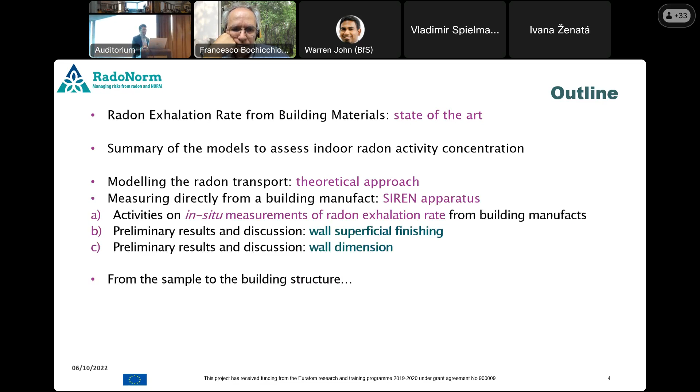Thanks to Radonorm, we were able to perform many measurements in situ, and we will see preliminary results on these measurements with a short discussion. Then we will have a part dedicated to comparing radon exhalation rate measured on samples versus radon exhalation rate measured directly from building structures, followed by some short conclusions.

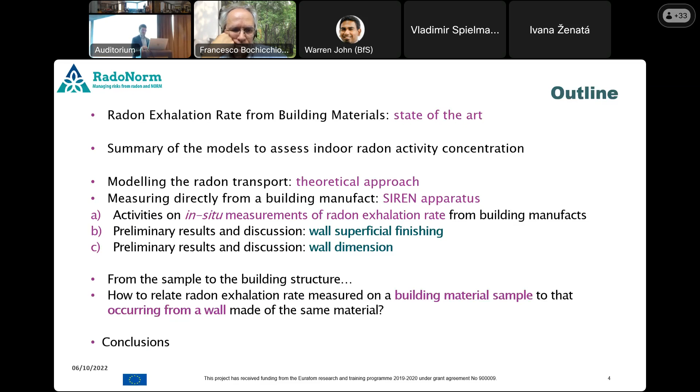Regarding the state of the art, we know that a last council directive requires consideration of any source of radon, including building materials. It's important to assess the radon exhalation rate from building materials, both for preventive and remedial intervention to reduce population exposure to radon.

According to the current state of knowledge and technology, the radon exhalation rate from building structures may be estimated through three different approaches. The first is modeling of radon transport inside the structure, by solving a radon transport equation in a porous matrix.

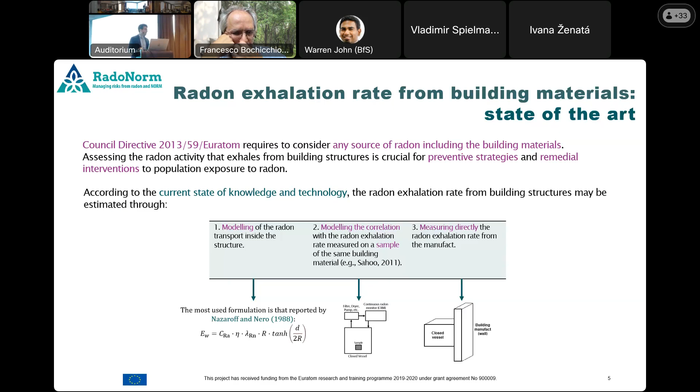The second approach is to model the correlation between radon exhalation rate measured on building material samples and the radon exhalation rate actually exhaling from a building structure made of that material. The third and last approach is to measure directly the radon exhalation rate from the manufact.

Here we have a table, also reported in our milestone, synthesizing the main advantages and disadvantages of each approach. In the first line you can see the references for each of the three approaches, then in the second line the advantages, and then the limits.

Regarding the modeling of radon transport inside the structure, the theoretical approach, the main advantages are that there are no difficulties related to experimental measurements, and it is the only approach feasible in preventive strategies when the building structure is not yet built. The main limits are that a wide dataset of input parameters is required to characterize the exhaling manufact, and the influence of installation conditions and environmental parameters are not considered, as they are very specific to the case scenario.

The second approach, modeling the correlation with radon exhalation rate from a building material sample, is useful because measurements are feasible and well documented in literature. But the main limit of this approach, which is also the most used, is that there is only one model to correlate the radon exhalation rate measured on a sample to that occurring inside a building manufact, for example a wall. There's also the requirement of a representative sample for that building structure, which isn't simple because in many circumstances you're forced to destroy the wall to take these samples. The last limit is that advective radon transport is neglected, because the pressure difference occurring in situ in a wall is not considered in laboratory measurements.

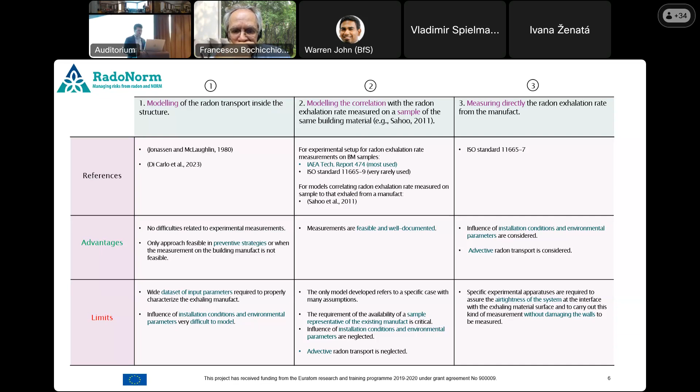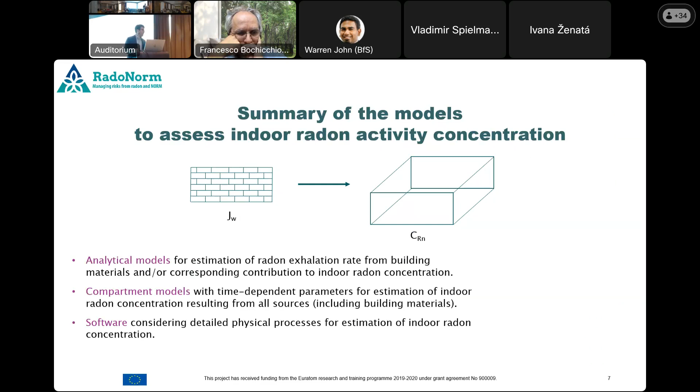In the milestone, you can find a summary of the models to assess indoor radon activity concentration, so to pass from the radon exhalation rate from building structures to the radon activity concentration indoor, in a room or dwelling. We divided these into three categories: analytical models, compartment models, and software considering detailed physical processes. You can find all of these in the milestone.

The first approach is the theoretical one. We developed a lot of solutions and formulations to estimate radon exhalation rate, divided into different models considering or not diffusive radon transport and advective radon transport. We developed this solution for three specific cases.

We can say three boundary conditions, described as letter A, letter B, and letter C: fixed radon concentration on both sides of a slab, fixed radon concentration only on one side of the wall or slab, or the third case, a wall in an environment with uniform radon concentration, meaning similar radon concentration on both sides of the wall.

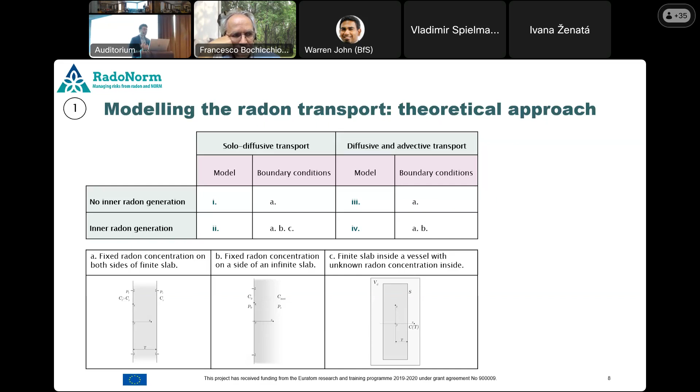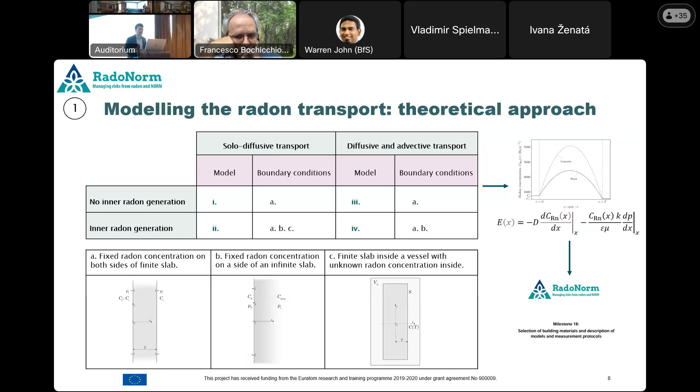Pertaining to these models, we decided to analyze 4 different models, considering or not the inner radon generation, and considering or not the advective radon transport. For each case, we developed a formulation to assess radon exhalation rate, starting from different input parameters, and all these results are reported in the milestone.

Pertaining to direct measurement of radon exhalation rate from a building structure, an experimental apparatus named SIREN was developed at our laboratory. It is the only existing apparatus, the first one developed to perform non-destructive measurement of radon exhalation rate from vertical surfaces.

It has some characteristics: it is self-sustaining, transportable, adjustable. It is capable of performing non-destructive measurements, and it is consistent with any continuous radon monitors. Here you can see an image of this apparatus.

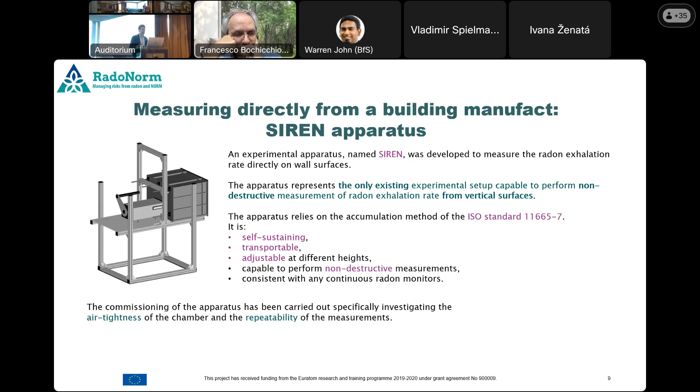Of course, we have also commissioned this apparatus, in particular on air tightness and repeatability of the measurements. Here we have another photo of the apparatus during the measurements.

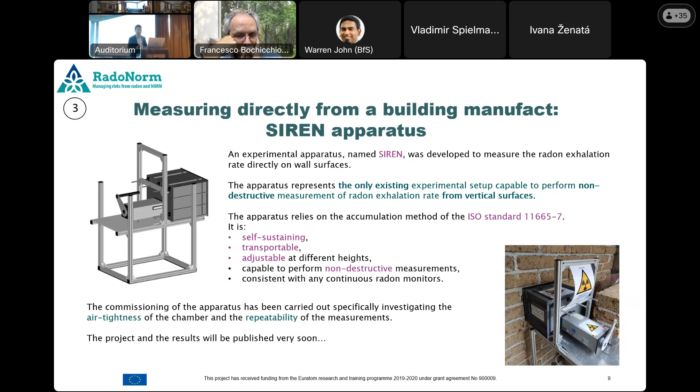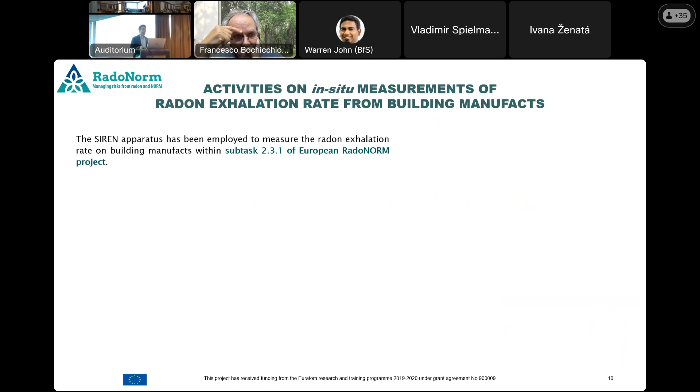Pertaining to the activities of in situ measurement with SIREN within the RadoNORM project, we have employed it to measure the radon exhalation rate from some building manufacts. We can see here an image.

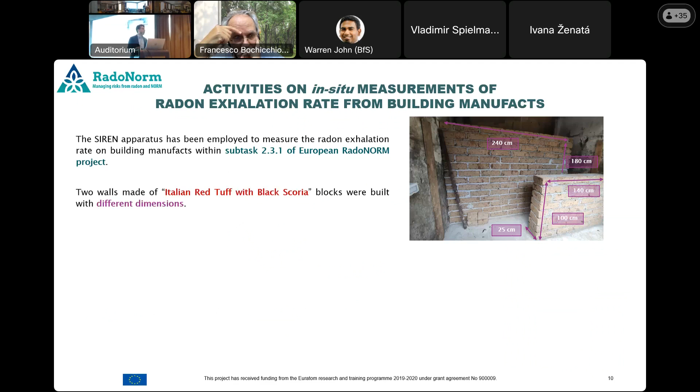The walls were made of a very common building material in central Italy, Italian red tuff with black scoria. A lot of cities in central Italy are built from this material, which has high radium-226 content, about between 150 and 270, so it is a very big problem relating to radon exhalation rate.

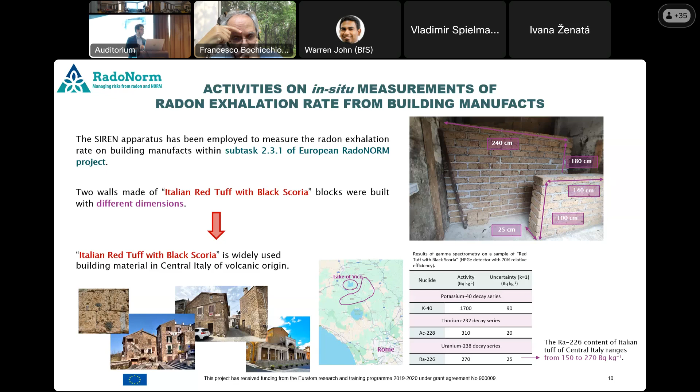The results of these measurements were particularly related to different superficial finishings of these walls. We decided to take these building material samples to build a wall, and the quality of the superficial finishing was increased time by time: first a rough wall with only blocks bound by mortar, then an intermediate plastered wall, and finally a painted wall.

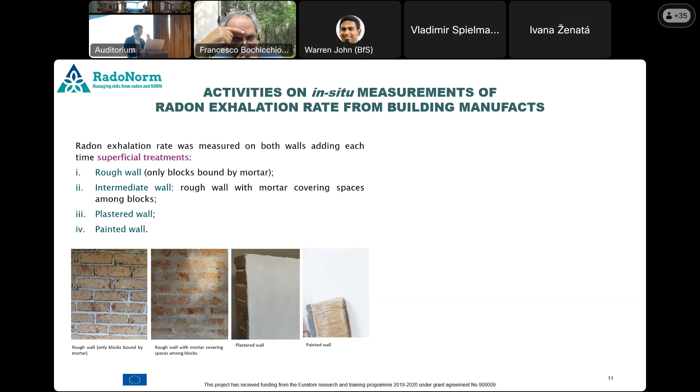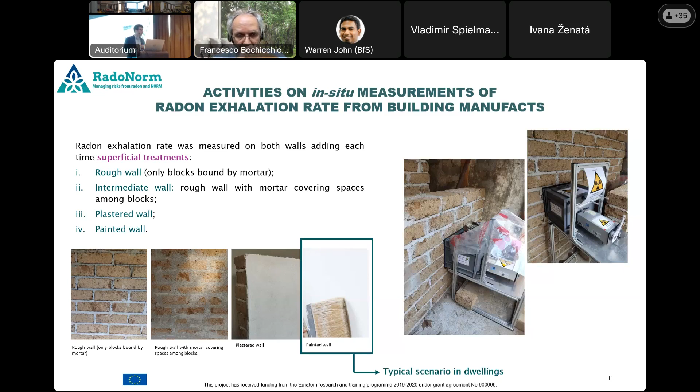We obtained a lot of results on radon exhalation rate for each of these configurations. Here you can see SIREN during the measurements, and of course the painted wall is the typical scenario in dwellings. These are the preliminary results on wall superficial finishing.

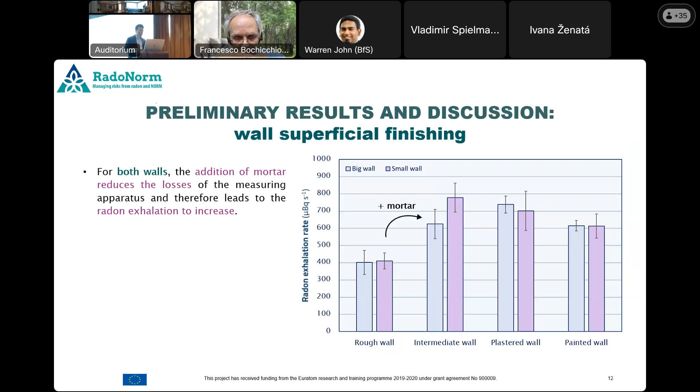For both walls, the addition of mortar reduces the losses of the measuring apparatus, and therefore we see the radon exhalation rate increase. Regarding the addition of plaster, we see a reduction of about 10% of radon exhalation rate, because it is an additional layer partially obstructing the radon exhalation. Adding a layer of paint reduces the radon exhalation rate by about 15%. So we can see this trend, and the effect of different wall superficial finishings on radon exhalation rate.

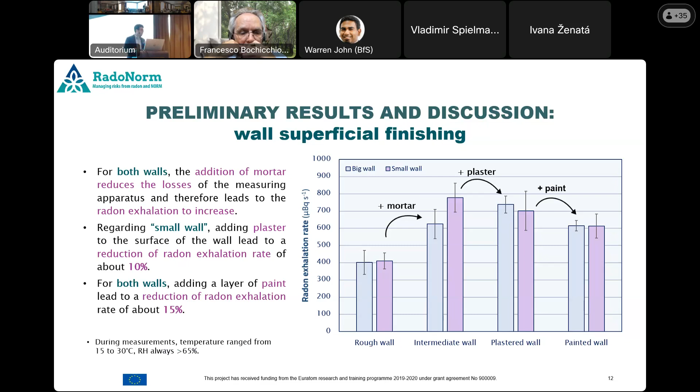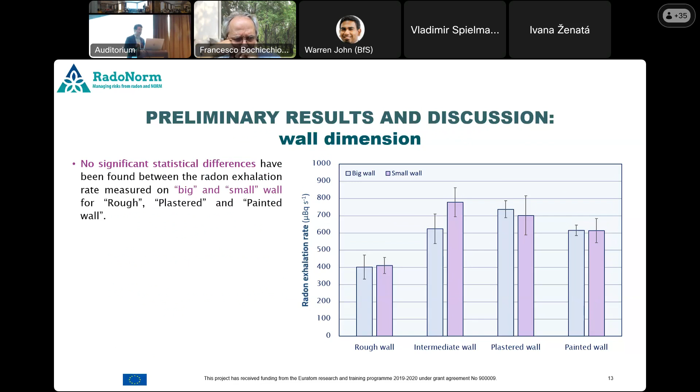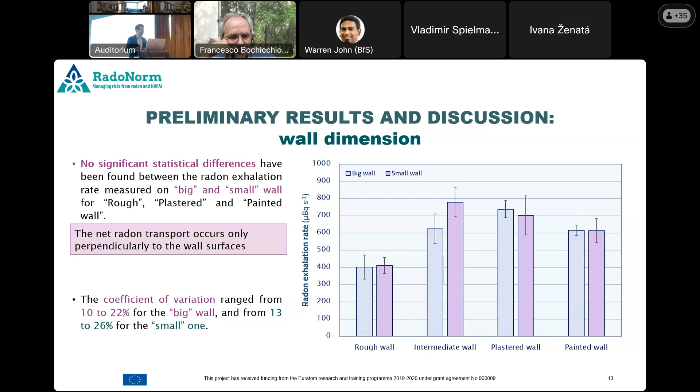Regarding wall dimension, we built two different walls of different dimensions, one big and one small. We noticed no significant statistical differences between the big and small walls, as results show no significant statistical differences. The net radon transport occurs only perpendicularly to the wall surfaces, and the coefficient of variation was very small, ranging from 10 to 22% for the big wall, and from 13 to 26% for the small one.

Now we have the big question: how to relate the radon exhalation rate measured from a building material sample to that occurring in situ, in a dwelling where people live, because most measurements are typically carried out on samples of building materials and not in situ.

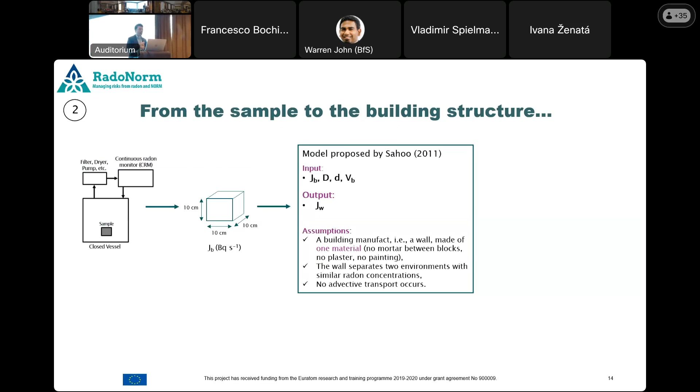We performed a lot of measurements on building material samples through the accumulation method described by IAEA 474. We had results on radon exhalation rate measurements, which we related using the model proposed by Dr. Sahoo, a model with many input parameters whose output is the radon exhalation rate from a wall made of the same material. We made this comparison within the work of the milestone.

It's important to point out the three main assumptions of this model: the building manufacture is made of one material. This is not exactly our case, because in situ you have a building manufacture surely made of mortar also, not only building materials, to bind all elements.

The wall separates two environments with similar radon concentration. This is not typically the case occurring in a dwelling, but it was in our case, and no advective transport occurs. I will show you the results in the next slide.

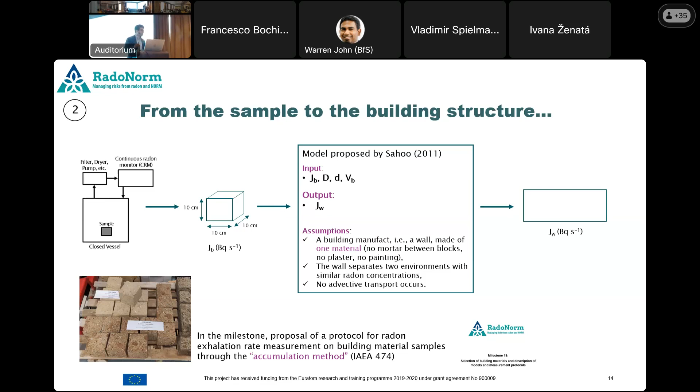In the milestone, we also developed a protocol for radon exhalation rate measurement using the accumulation method. We are finalizing the last details on this protocol, but it will surely be finished by the end of Radonorm. It was focused on the Thoron interference on this kind of measurement, and also the influence of sample dimensions.

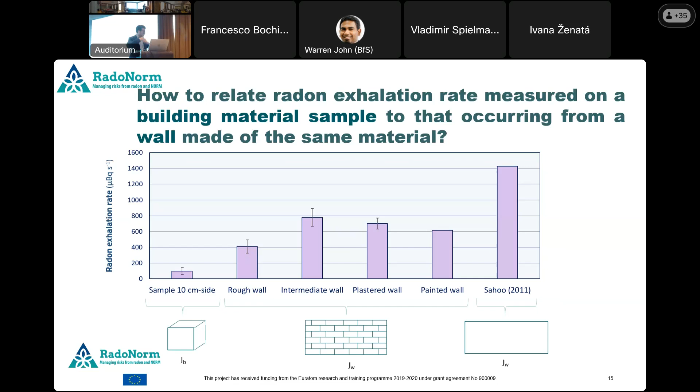Much more interesting is that the value predicted with the Sahoo model is really higher than that found actually, that measured. This can be explained in different ways, and we are still performing experiments, but one main reason is that the wall of Sahoo is made of only one material, while the walls of dwellings in a typical scenario are made of more than one material, with discontinuities between them, such as the mortar used to keep the blocks bound together.

Conclusions: wall dimensions do not influence the measured radon exhalation rate from the wall surfaces. Increasing the quality of the wall's superficial finishing reflects an increase of measured radon exhalation rate due to possible losses. Adding a layer of plaster or paint leads to a reduction of measured radon exhalation rate of about 10 and 15% respectively.

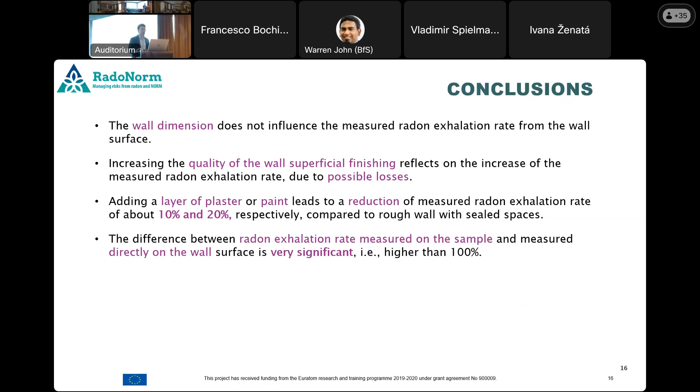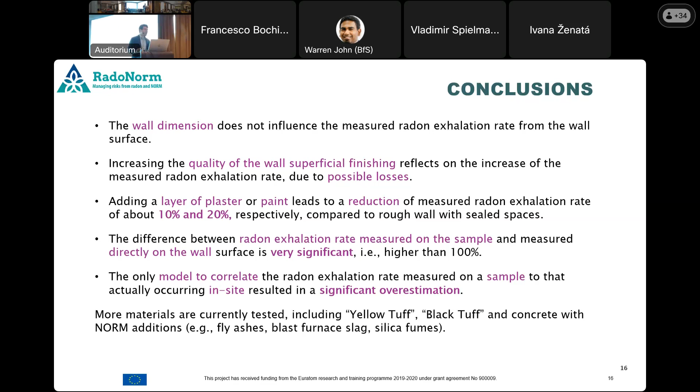The difference between radon exhalation rate measured on the sample and measured directly on the wall is very significant, higher than 100%. The only model to correlate the radon exhalation rate measured on a sample to that actually occurring in situ resulted in significant overestimation. More materials are currently being tested; I only talked about this Italian tuff, but we are developing the same results for other materials, other kinds of tuff, and also concrete with NORM additions. The results will be presented in the next months.

Thank you for your attention, and I am here for questions. But before questions, I think Geraldine, my colleague, will present the second part of the presentation.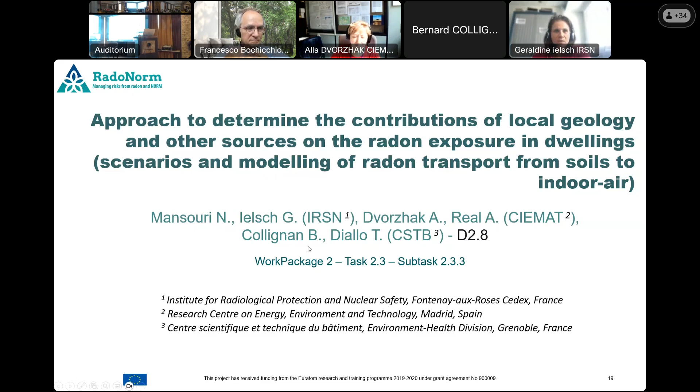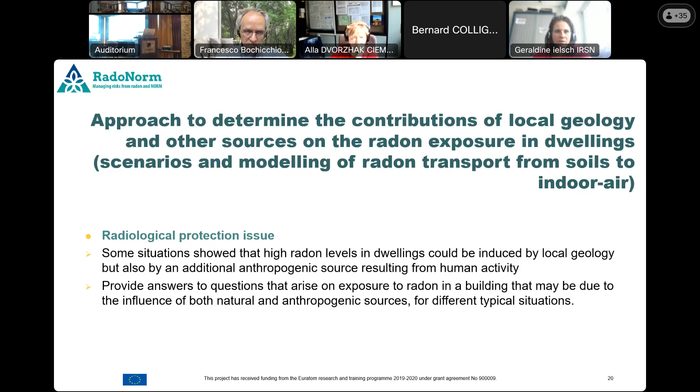The radiological protection issue that was our interest to test this approach was the following. Some situations showed that high radon levels in dwellings could be induced by local geology, but also by additional anthropogenic source resulting from human activity. The objective was to provide answers to questions that arise on exposure to radon in a building that may be due to the influence of both natural and anthropogenic sources, for different typical situations.

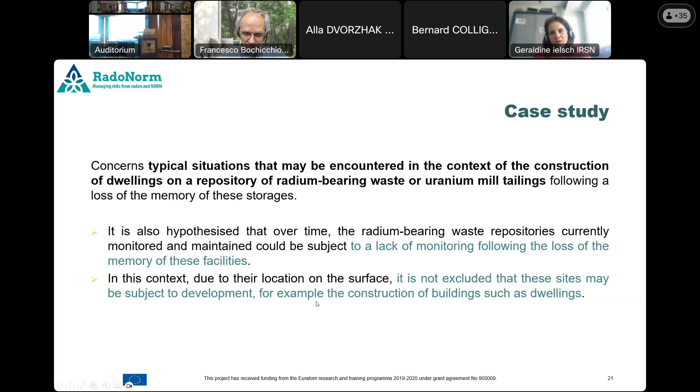So we chose a case study to apply our modeling. This case study concerns typical situations that may be encountered in a particular context, in the context of the construction of dwellings on a repository of radium-bearing waste or uranium mill tailings, following the loss of the memory of the storages. So it is also hypothesized that over time, the radium-bearing waste repositories currently monitored and maintained could be subject to a lack of monitoring following the loss of the memory of these facilities. And in this context, due to their location at the surface, it is not excluded that these sites may be subject to development, for example the construction of buildings such as dwellings. So it is the context of the study.

So the method we applied, it was only modeling. So modeling the transport of radon from the soil to the building in order to estimate the indoor radon concentration. And by defining different scenarios and by using the calculation tools that were existing within partners.

So these tools are the following. The first is T2Rn, developed at IRSN, and this code is based on the Tough2 software. It is a US developed software, and we developed at IRSN a special module for numerical modeling of radon emanation and transport in soils. This software was used to calculate the radon flux, the radon exhalation at the interface between the soil and the basement of the building.

The second tool applied was MATHIS-QAI, developed at the CSTB. This software predicts the indoor air quality of buildings, and can also assess indoor radon exposure due to radon entry from the ground. The last one applied was Indorad, developed at CIEMAT. This is a dynamic model designed to estimate the radon concentration inside buildings, taking into account changes of meteorological conditions. So we applied these three calculation tools.

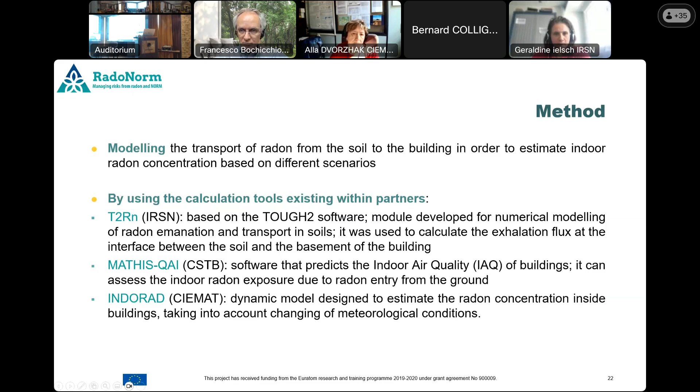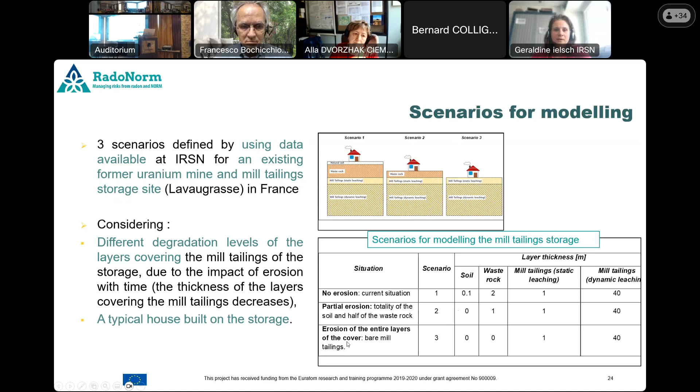So the thickness of different layers are different from the different scenarios, and we also consider the typical house built on the storage. Here on this table you have more precisely the different depth, thickness of the layers - the soil, the waste rock, and the mill tailings - and the degradation degree of these different layers according to the first scenario with no erosion, the second with partial erosion, and the third with erosion of the entire layers covering the mill tailings. We also used data for the modeling concerning the building.

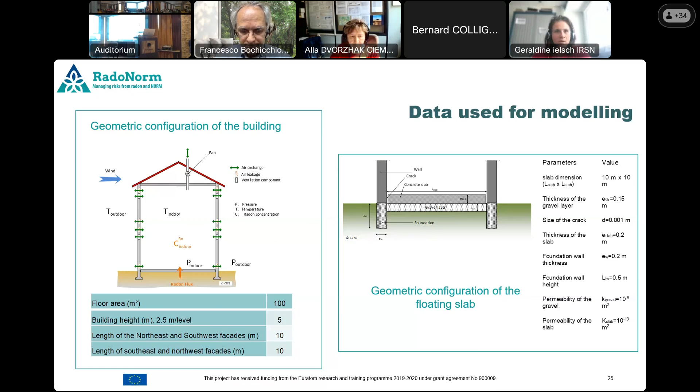So this is the geometric configuration we chose, with some dimensions of the buildings you can see here. We also chose the geometric configuration of the floating slab, the interface between the soil and the building, for the modeling, with parameters concerning the dimensions, the thickness of the slab, etc., and the permeability of the gravel and the slab. So this is the model and the data we used for applying our tools according to the three scenarios we defined.

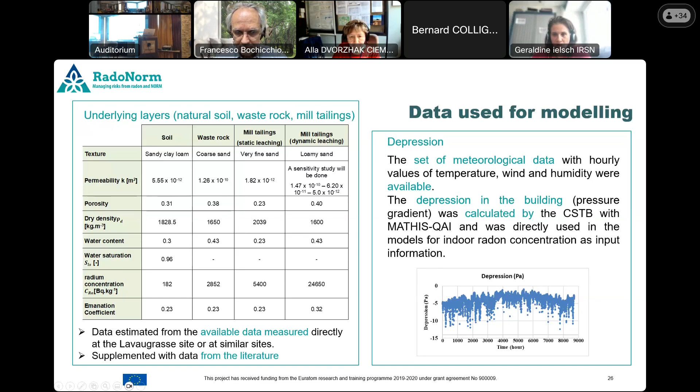Some other data were also used for modeling the underlying layers of the natural soil, the waste rock, and the mill tailings. These data were from direct measurements we have at IRSN for the existing site, and some data were supplemented with data from the literature for some parameters. We also used a set of meteorological data, and the depression of the building was calculated by the CSTB using MATHIS-QAI, directly used in the models for indoor radon concentration as input information on the basis of this meteorological data. So now, just a word on the models application.

We used two processes of collaborative numerical simulation work. The first is a collaborative process using T2Rn, developed at IRSN, and MATHIS-QAI developed at CSTB. The process collaboration is the following: MATHIS-QAI calculated the depression of the building, that was input in T2Rn, which calculates the radon flux at the soil-building interface, that was used by MATHIS-QAI to calculate the indoor radon concentration.

And the second collaborative process was by using MATHIS-QAI and Indorad. MATHIS-QAI calculated the depression of the building, that was used by Indorad to calculate the indoor radon concentration.

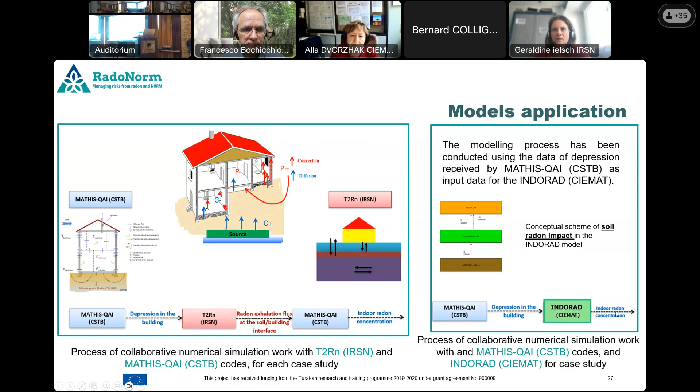Let's see now. I just added here some references that are also available on the report we did, and let's see now the results we obtained.

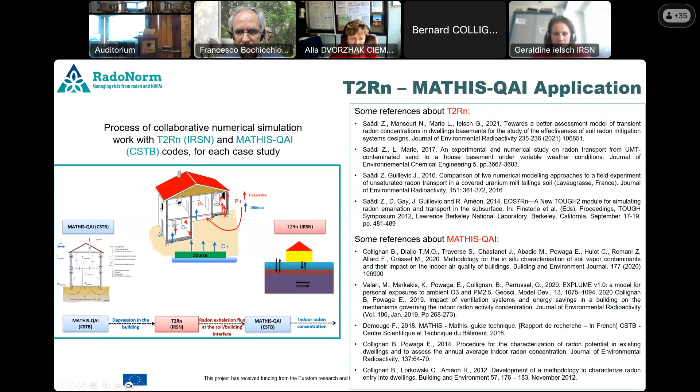Some examples of results we obtained by this first process of collaboration using T2Rn and MATHIS-QAI. So here are some examples of results.

On the first line here, you have the results for an example for scenario 2, that is modeled here, by using T2Rn. T2Rn calculates the emanation and the radon transport in the soils until the flux at the interface with the building, and you have here the different radon exhalation flux calculated for different permeabilities of the mill tailings here.

And this exhalation flux, when used and introduced to the MATHIS-QAI application that calculates the indoor radon concentration, you have here the examples of the average annual indoor concentration for the three scenarios we defined here.

So this is the first example of results we obtained, and I'll give the floor to Alain for the final part of the presentation.

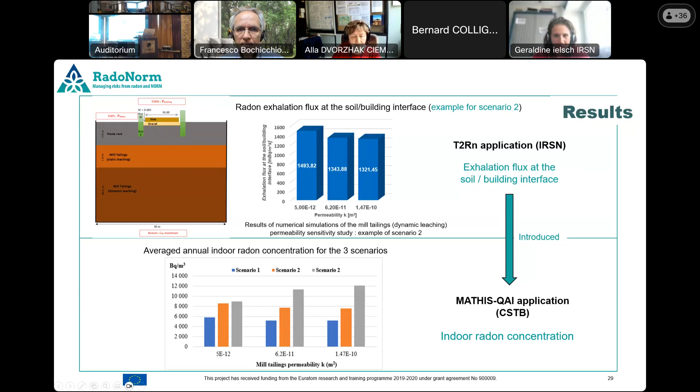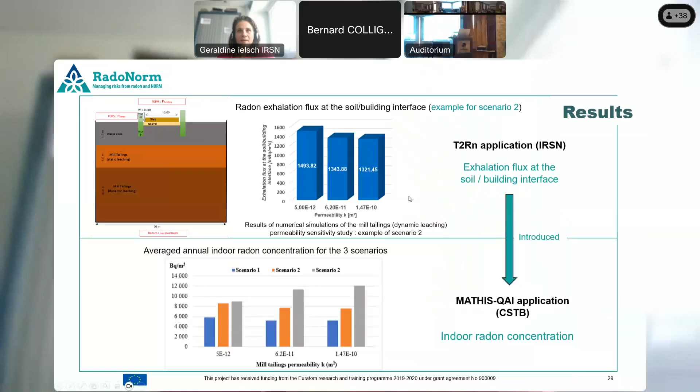Alain, do you want me to share the slides, or will you share your presentation maybe? But I can go on. Could you continue, Geraldine, and I will comment? Okay, sorry. Can you see it? Yes, but it is your slide. Yes, yeah, so.

Okay, thank you, Geraldine. So in CIEMAT, we participated in this task of modeling indoor radon concentration with the INDORAD model, as said before, Geraldine.

It is a model for estimating radon dynamics with time-dependent meteorological parameters, which includes processes like emanation, dispersion, disintegration, removal from building. The model is based on a systemic approach where the flows of material between compartments are considered.

This approach allows simplifying the mathematical processing and enables considering together all known sources of indoor radon and reflecting temporal variability of indoor radon concentration. This is principally because we don't take into account spatial resolution.

The model is based on the above-mentioned assumptions and the theory of other authors. For example, the principal author is Luis Font from Spain, among others. Please, next one.

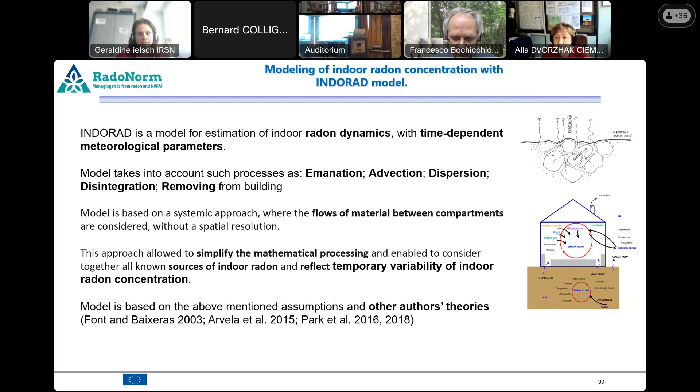Geraldine? Yes. This is the mathematical description of the model. As I said before, it is a compartment model. It is a system of ordinary differential equations.

The model describes radon as a balance of input-output rates, and here you can see the equations. The first two are for the soil, for the upper layer disturbed soil and undisturbed soil.

The last equation is for indoor radon, and in grey is the differential equation for building material, which was not included in this study, but it can be included.

I will not enter into many details, because if you want, you can see details in the article already published. You can see here, in Environmental Science and Pollution Research.

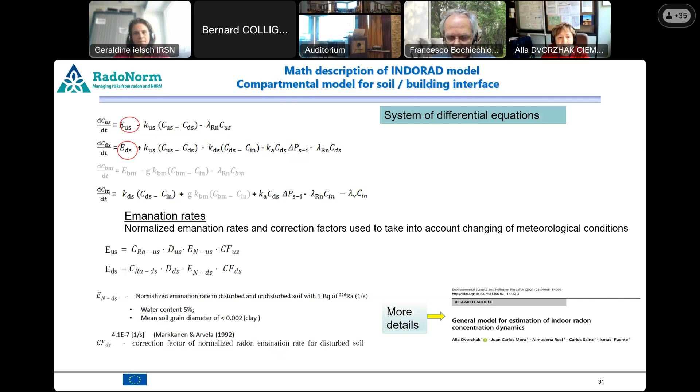Please, next one, Geraldine. So the model was realized in the MATLAB framework and was put to use for a case study of a high background radiation area.

Sited in Saelices el Chico in Spain, in collaboration with University of Cantabria, Professor Luis Quindos, based on the measurements carried out for two weeks.

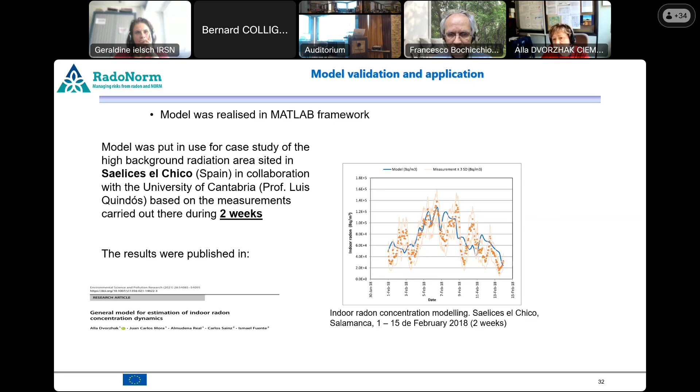And here in the graph you can see results comparing the modeling with measurement data during these two weeks. Next one.

Yes, thank you. In the Radonorm project, we put this model to use for a much longer period, for one year, to calculate indoor radon concentration during one year.

The model was applied for two case studies, Belleroche and Lavaugrasse, both in France. As said before, Geraldine, the scenario was prepared by IRSN for modeling.

For a building constructed on a former uranium mine and mill tailing storage site, Lavaugrasse, as a hypothetical scenario.

So firstly, the model was put to use in a case where we had measurement data to compare with modeling. This was for the Belleroche case study, also in France, where a set of measurement data was available for indoor radon during one year, as well as necessary meteorological parameters.

In this way, the model was tuned based on a geographically close site. The measurement data was kindly provided by IRSN and CSTB colleagues. Then the fitted model was applied to the prognostic case of the Lavaugrasse scenario, with a hypothetical dwelling built on a former uranium mine. Please, next one.

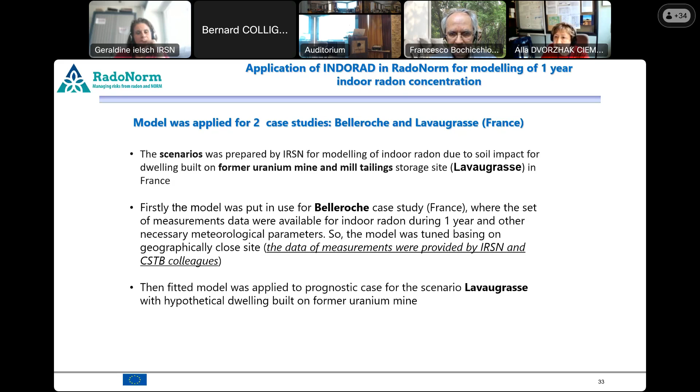So here you can see results of modeling during one year: the temporal variability of indoor radon concentration for the Belleroche case study, a real case study.

Here in red is modeling, and in blue, measurement data. On the left, indoor radon concentration, and on the right, radon concentration in the upper layer of soil. Now, next one.

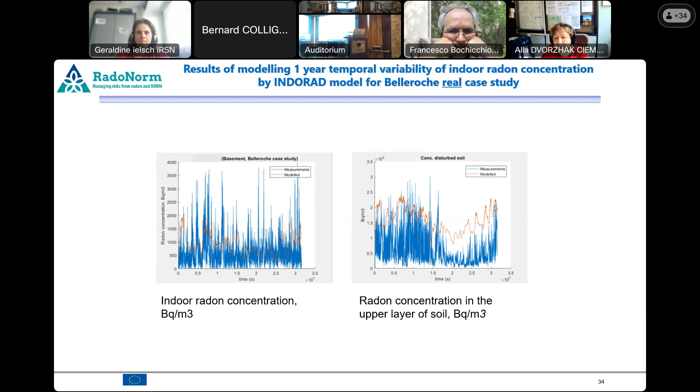Here are the results of modeling one year of temporal variability of indoor radon concentration using the Indorad model, for the Lavaugrasse hypothetical case study. On the left, indoor radon concentration and radon concentration in the upper layer of mill tailing are shown. We don't have any measurements here, so this is only modeling.

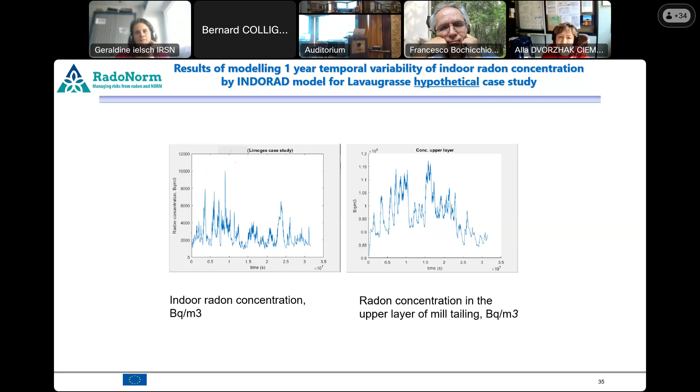As a summary of this work, we can say that the application of Indorad and French models for modeling radon transport and indoor concentration for the scenarios showed that the results obtained are in the same order of magnitude. The values calculated for the radon fluxes at the soil-building interface and the indoor radon concentration are high and consistent with the scenarios and previous studies.

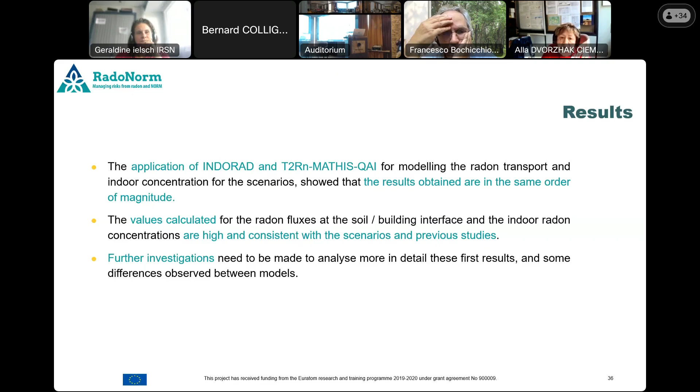Further investigation needs to be made to analyze these first results in more detail and examine some differences observed between models. In conclusion, the study showed the feasibility of using calculation tools to help experts in radon risk assessment carried out on exposure to radon in buildings. This work sought to compare existing modeling strategies in Europe.

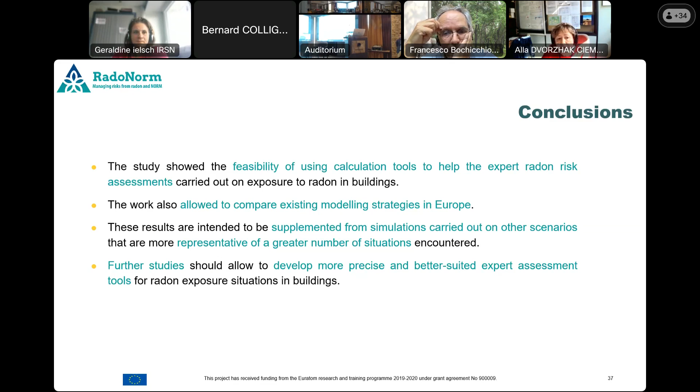The results are intended to be supplemented with simulations carried out on other scenarios that are more representative of a greater number of situations encountered. Further studies should allow the development of more precise and better suited expert assessment tools for radon exposure situations in buildings.